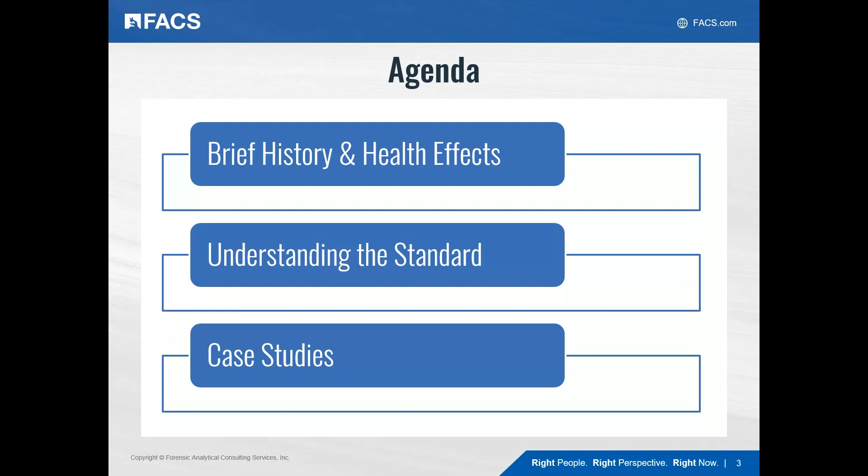So for today's webinar, I will begin with a brief history of silica and exposures, as well as the health effects associated with silica exposures, going into understanding the standard, some of the differences between the general industry standard and the construction standard, as well as case studies, because everyone loves a case study. So, we do environmental consulting. So some of the exposure assessments that FACS has been involved with highlight, when you use engineering and work practice controls, what you see in terms of reduction of exposures to individuals, which is very important.

So I can't talk about silica without talking about Hawk's Nest. The health effects associated with silica have been known throughout the years. However, it really wasn't highlighted as much as it should be until 1930. What happened was in West Virginia, the Hawk's Nest Tunnel was being built, and several workers were pulverizing this rock trying to get the tunnel to go through. And some of this rock contained as high as 99% silica.

And obviously at this time, we didn't have OSHA yet. So by the time the work ended, over 476 workers had died of silicosis. And it was estimated that 1,500 developed this disease within a year or two. So they had high acute exposures to silica. And it's also stated that this probably is a large underestimate of what happened in terms of exposures to individuals and the health effects during and after the tunnel was built.

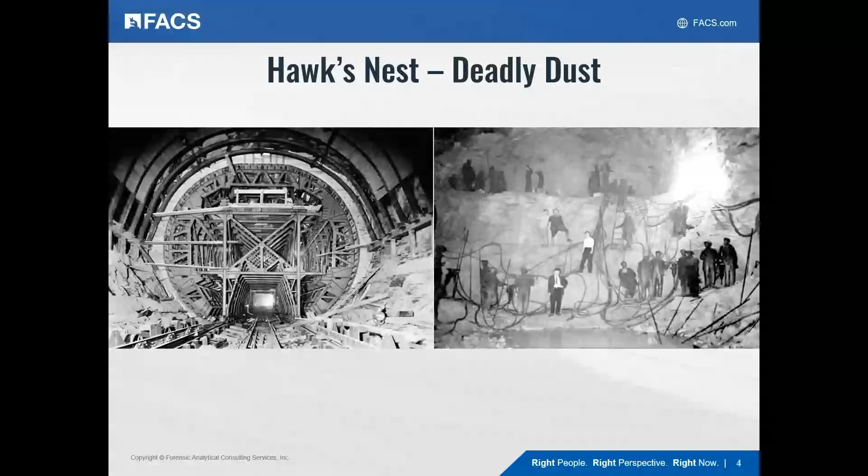But it highlighted the importance of using engineering controls and respiratory protection, because individuals were not wearing respirators when doing this work. So it was a pivotal moment in silica, as well as general industrial hygiene's history. And that happened right in 1930.

And so in 2016, OSHA revised the silica standard. It became in effect on June 23, 2016. And OSHA began enforcement of the standard for construction in 2017 and enforcement for general industry in 2018.

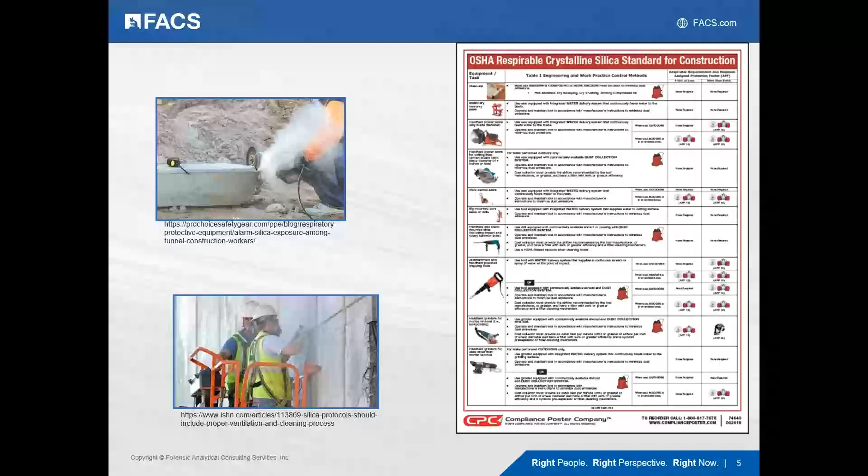I myself have done a lot of presentations on silica, and this is actually my first general industry presentation, because a lot of the focus has been on construction, because that's where we know there are a lot of exposure issues, where people are working with concrete materials, pulverizing it, putting small particulates into the air for exposure. And so a lot of focus has been on the construction industry itself. And although there is a standard associated with general industry, we really didn't see a lot of news or discussions on it.

But a colleague had sent in an article that was recently in the Los Angeles Times, dated September 24th, 2023, and that sparked this presentation. It discussed the number of individuals in general industry dying of silicosis and other silica-related health issues.

This specific article talked about California itself, and it talks about fabrication workers and the development of silicosis within these really young fabrication workers. It's not the 60-year-olds or 70-year-olds with chronic exposures getting silicosis, but now men in their 20s and 30s. And silicosis is an incurable disease, and it can kill someone, cause people to potentially have lung transplants, and it's a very debilitating disease itself.

And within this article, they talked about a study that was done in July 2023 by the American Medical Association, in an article called Silicosis Among Immigrant Engineered Stone Countertop Fabrication Workers in California. The study cited 52 male patients that were diagnosed with silicosis caused by occupational exposure to respirable silica dust from this engineered stone. Of those 52 patients, 20 suffered from progressive massive fibrosis, 11 needed lung transplants, and 10 died due to their exposures.

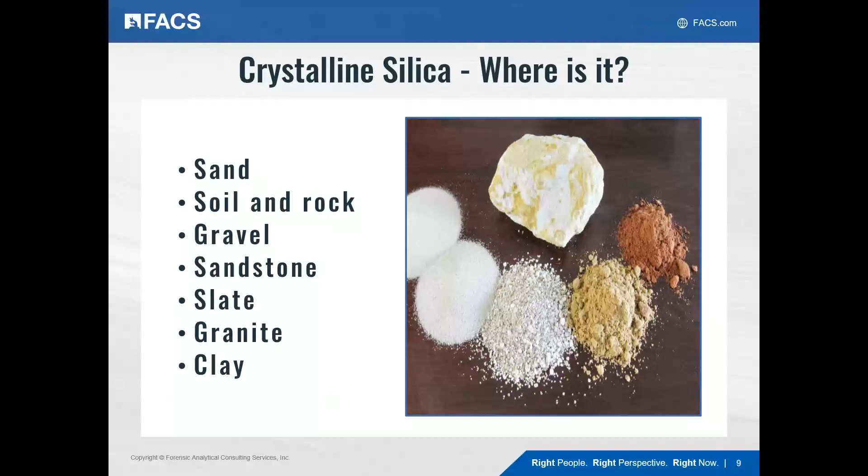And again, we go to the beach all the time, right? Maybe I'm on the West Coast, so I'm assuming a lot of people might be, but you might not. But if you go to the beach, you're in front of silica, right? You're being exposed to it, but is it harmful? And the answer is no, not if it's in that size fraction.

What we're worried about is the really small pieces of silica that are small enough to be inhaled and travel all the way down to the lungs themselves. So if you're just holding sand, it's not an issue, but let's say silica is in concrete. If you're pulverizing it, if you're jackhammering it, if you're doing mechanical work to it, you're creating a really small size fraction of the silica particulate itself. And that has the ability to go into the respiratory system and get down to the lungs.

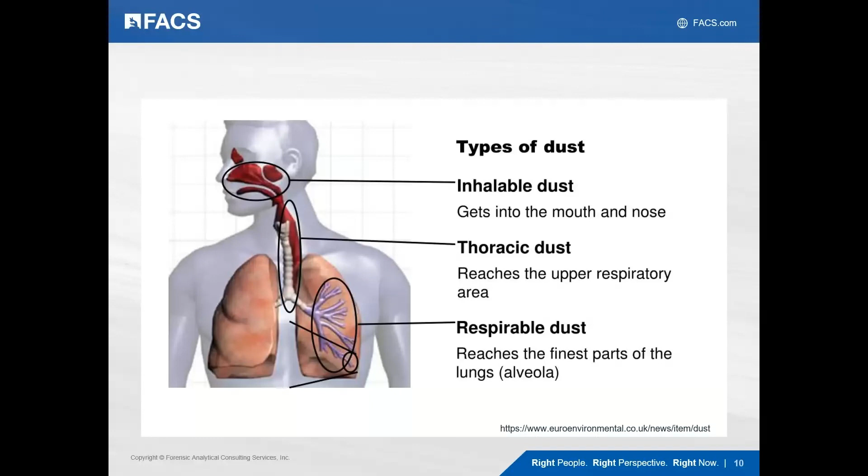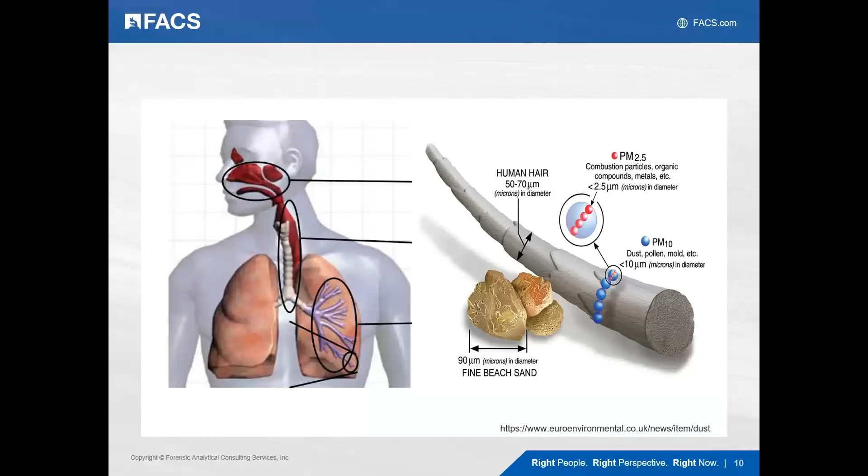And then look right here, your hair, just think about the size of your hair. That's 50 to 70 microns. So really, really small particulates is what we're worried about. I say it's ubiquitous, it's everywhere, but we're talking about, again, the small sizes and a specific concentration.

So what industries are we really worried about in terms of exposures? Well, as I alluded to in the previous slides, it's the engineered stone fabrication. This is probably one of the most dangerous kinds of countertop, the engineered stone, also known as quartz, again, silica. And it has much more silica than any other type of countertop. So people working with engineered stone fabrication have high exposures. Concrete mixing and cutting, that tends to be more of the construction side of work.

Sandblasting in general industry, a lot of people still sandblast with silica-containing material. Brick and stone cutting, foundry, mining, fracking, pottery manufacturing, believe it or not. We've done exposure assessments for silica with EVS or custodial staff when they're doing deep cleaning of ceramic departments at school. And there are measurable levels of silica found in these types of work operations. So it's kind of stopping and thinking about where is there silica and where could there be potential exposures. And there's a lot of this.

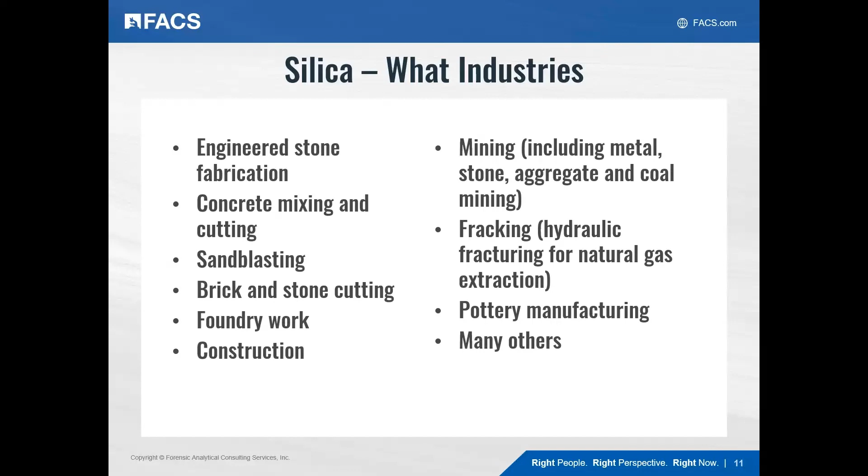So why are we here? Why is it harmful to you? Well, it causes silicosis. And the problem with silicosis is, one, it is incurable. And a lot of the time you can develop silicosis without developing symptoms up front. By the time you maybe have an x-ray or start to feel issues with your respiratory system in terms of harder breathing, it's too late at that point. Some of the symptoms that might occur are shortness of breath, coughing.

As I said, the dust gets down into that respiratory system all the way down to the lungs, and it can cause fibrous scar tissue, which you'll see as nodules on this x-ray here. It is very debilitating, and it can be fatal. And there's 3 different types of exposures that we talk about with silicosis. There is chronic exposure, where there's a latency period where you really won't see anything for at least more than 10 years. And it's really small, low exposures happening through greater than 10 years of someone's work span. And with that, the severity of the illness is highly variable. It might be very mild, or it can be very severe.

The next is accelerated, where you have a latency period of 5 to 10 years, and you have higher exposures. So you're not getting those really small chronics, a little bit higher. And now the severity of the illness is likewise variable, but often more on the severe side. So your lungs aren't getting a chance to repair, to try to kick out the dust if they can. So you see these more severe health effects associated with it.

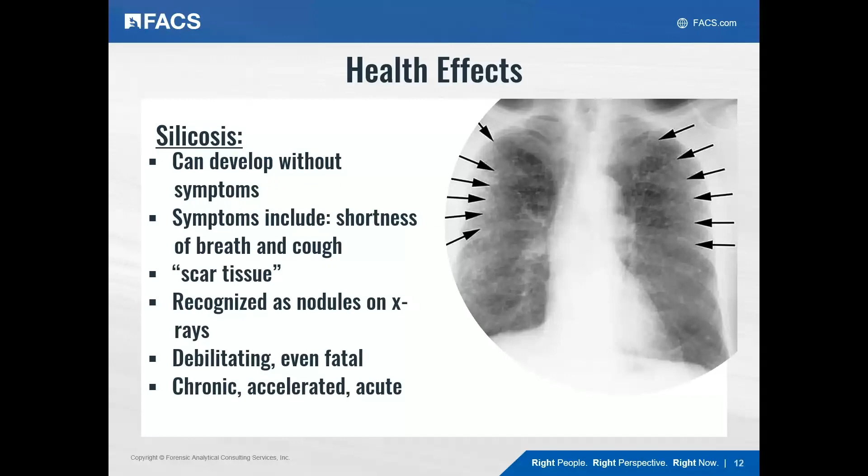But not only is there silicosis to worry about, there's other diseases that are associated with silica exposures. There's chronic obstructive pulmonary disease. Workers exposed to silica, those who have silicosis, are also at increased risk of tuberculosis, which is a contagious and potentially life-threatening infection. Individuals can also have lung cancer, kidney disease. It's also associated with autoimmune diseases such as rheumatoid arthritis and scleroderma.

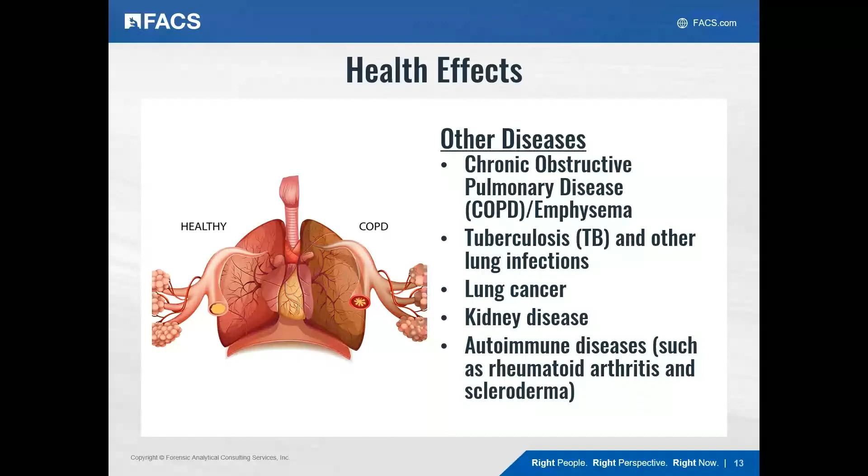So now that we know it's harmful, we know there's a big push to try to prevent this, what standards and regulations do we have that are trying to accomplish it? So when we're thinking about OSHA, we have our airborne contaminant list, which is just that list that we look at that shows what are the permissible exposure limits associated with that specific contaminant. We can look at that. There's also the construction standard that's specific to those in the construction industries and ways to reduce exposures. And there's also general industry and maritime.

So the construction standard only applies to construction, although some people in general industry may do portions of that work at different times of their work schedule. But the general standard applies to occupational exposure.

Sorry, my PowerPoint might turn off here. I just had a, oops, sorry, one moment. It just kicked me out. Hold on one moment. Let me know if I can share my screen too, Michelle. Have it. Sorry, that was, it started to think. Okay, hold on. Okay, do we see it now?

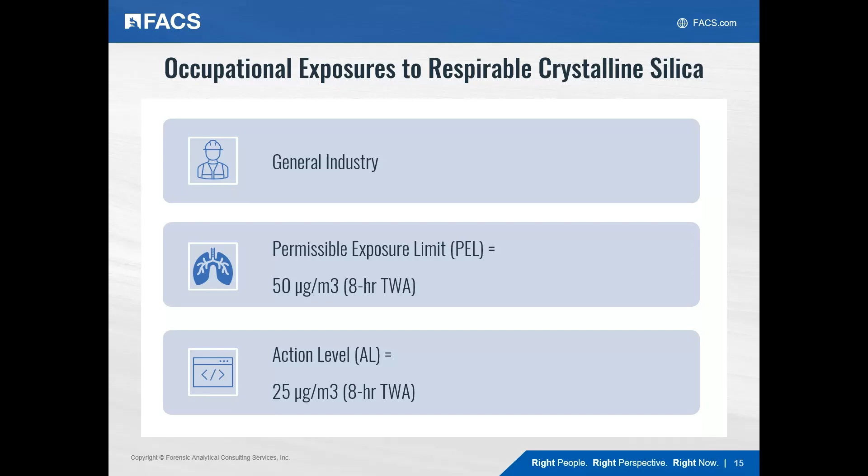However, despite the fact that this started in 2016 and in 2018 became enforceable in general industry, OSHA still estimates that over 100,000 workers in general industry and maritime are exposed to silica levels that exceed this new permissible exposure limit. So that just shows you that even putting out the standard, there still needs to be more awareness and education to individuals of the potential hazard, as well as how to protect individuals from exposures to silica.

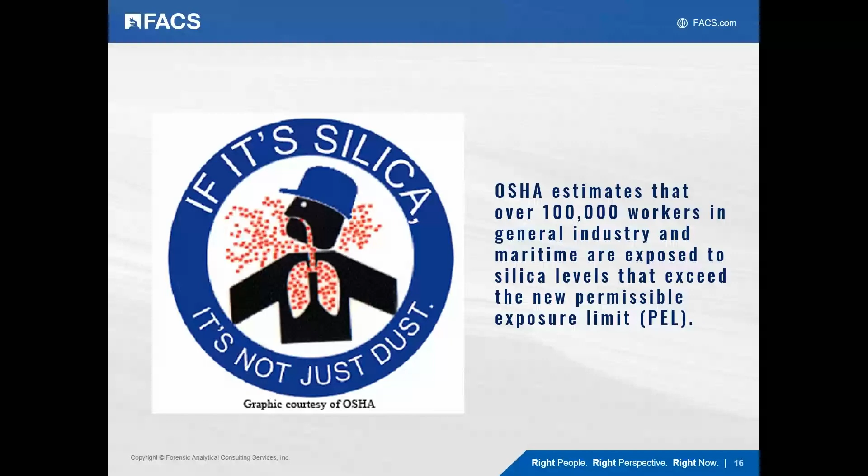So one of the parts of the standard in general industry, again, talks about the exposure assessment, and they kind of go about it 2 different ways. They say you could use the performance option or the scheduled monitoring option. Because we want to see what is the exposure to these individuals. If it's greater than the action level, again, they have to start implementing controls and a bunch of different other requirements within the standard. If they are above the permissible exposure limits, there's even more requirements associated with it.

So in order to do this, you've got to perform an assessment. Number 1 is a performance option. So that gives employers flexibility to determine the 8-hour time-weighted average for each employee based on a combination of air monitoring data that they collect themselves and the use of objective data. And so the objective data is looking at data that is most reflective of work conditions at your site without you actually doing the work.

So examples can be air monitoring data from industry-wide surveys, calculations based on the composition of a substance. You can do area sampling results or historical air monitoring data collected by the employer. So you've got information from way back when, and if nothing has changed, you can still use that data.

Within general industry, I tried to do a little research to see if they've got a lot of that industry data available, and it's not as robust as it is for construction. You can Google construction objective data silica, and there's a few websites that go over if you're jackhammering and this is happening, they'll have data for you that's available. So you can use that if you're maybe a smaller business and don't have the funds to perform your own exposure assessments.

And with that, they require a written exposure control plan. And what the written exposure control plan is, each individual task that's going to be performed has to be described along with what controls are going to be used, what housekeeping measures are going to be used, and what respiratory protection is going to be used. So you're not just going to have one written exposure control plan unless it's only one task that involves silica.

But if there's various tasks, you're going to have various written exposure control plans, and maybe even the same task, but within different environments. So for instance, if you have a fabrication worker, they may be cutting it inside the facility, and you have a written exposure control plan associated with the work done in the facility, but maybe they go to the residential home where they're going to be putting in the new stone top in someone's kitchen, but they've got to cut and maybe grind, polish, and do a little bit more work.

You're going to have another written exposure control plan for that. So it's something that employers must do, and they've got to implement the use of it, and it's got to be reviewed yearly and made available to individuals.

So to me, this is kind of like, if you think about construction, a job hazard analysis, looking at the issue and making sure that you are making it specific to the situation in which the work is being done, rather than just saying we're going to use local exhaust ventilation. It's more specific on what's going to be done for that specific work task.

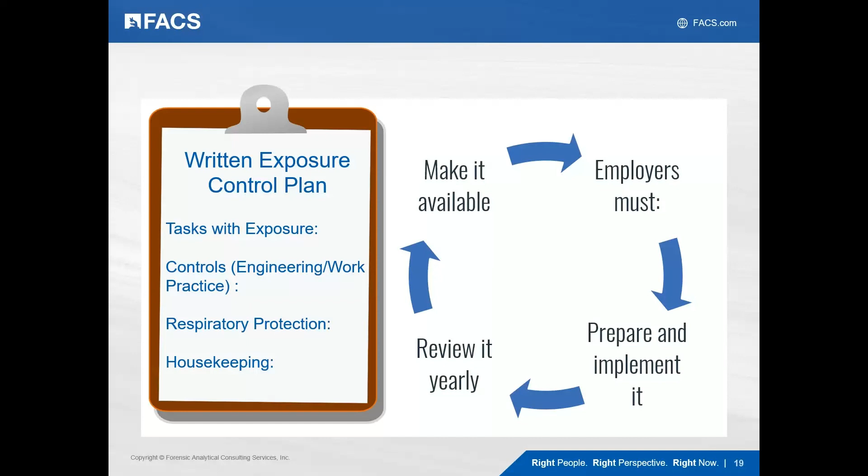And it's very important, and it's very spelled out in the standard, that the use of exposure controls is necessary when you're dealing with silica. So as we know, we have this hierarchy of controls in industrial hygiene where we begin with engineering controls. There are other ones, elimination, substitution. Let's pretend like we can't get rid of the silica. It's in the concrete, or it's in this granite piece of material. It's going to be there.

So we want to look at the engineering controls. How are we going to reduce exposures? Are we using wet methods, so we don't allow that silica dust to become airborne? Are we going to use local exhaust? Work practices, maybe we're reducing the amount of work that individual can do because we know that there's high silica exposures.

As well as at the end, the personal protective equipment, the use of respirators is very important. So we want to start with the higher controls, and then as necessary, the use of respirators as our last line of defense.

And again, something different in general industry versus construction is that in the construction standard they have that nice table for you that outlines what PPE is supposed to be worn during certain situations. They pretty much tell you what you have to use. When you're doing general industry and performing your own assessment or objective data, you have to use the calculated information or air monitoring data that you have available to dictate the specific respiratory protection that will be required for the individuals.

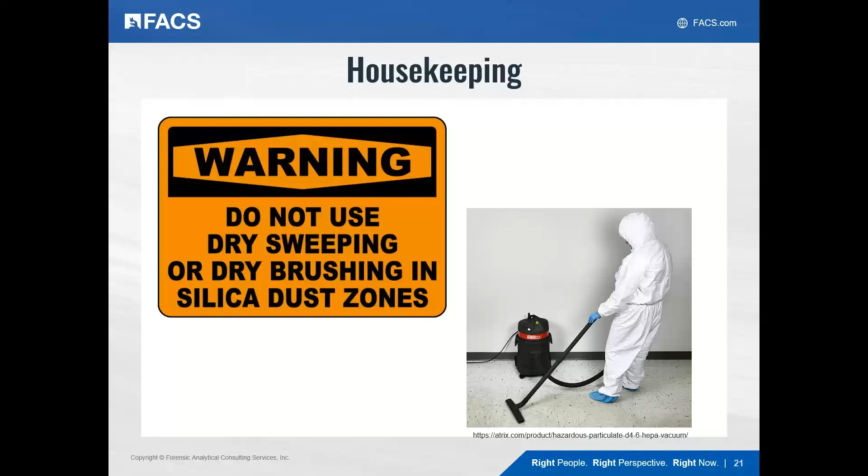And medical surveillance is also a requirement. So if a person is exposed to silica at or above the action level for more than 30 days in 1 year, the employer has to make medical surveillance available at no cost to the employee. The initial examination has to be offered within 30 days of employment. So you need that chest x-ray to look at what is going on with the individual themselves.

And then every 3 years, they have to go back in with the medical surveillance program, get their chest x-ray, perform the physical exam, the pulmonary function test. Again, remember I said in the health effects that they're more prone to tuberculosis. So the medical surveillance program also requires that the individuals are tested for TB.

So it's probably one of the more stringent medical surveillances I've seen with OSHA. We have asbestos, where they do require the annual chest x-rays, and lead for testing. But this one was probably one of the more stringent ones I've seen, again, asking for the TB test.

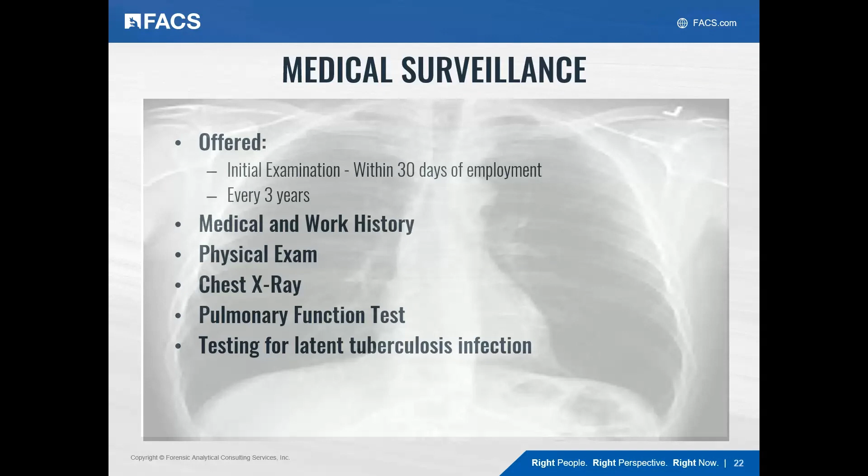So it's very important. The whole goal is we want to reduce exposures to individuals so that we're not hitting this action level, so we're not having to put people into medical surveillance programs, because it's costly, it's time-consuming, and it requires a lot of employers and employees. So the goal here is to reduce exposures to the extent possible.

And additional items is the record keeping. You have to make sure that you keep all the air monitoring data that you've collected to date, and that outlines what was the task that the sample was collected during, what are the analytical methods. The standard specifically talks about sampling and laboratory requirements associated with the standard. So you can't just use any lab. It has to have a specific detection limit and use specific analytical methods.

If you're going to use objective data, you've got to make sure that you are also keeping that, so that you can show someone, if we're not collecting our own samples, here's the data we're using in order to characterize your exposure. So what were their testing protocols where you got the objective data from? What is the source of the data? Any of the other relevant information that puts your situation similar to the situation of the data that you are using. And you've got to keep all of your medical surveillance information as well, which is the medical written opinions of the health professionals.

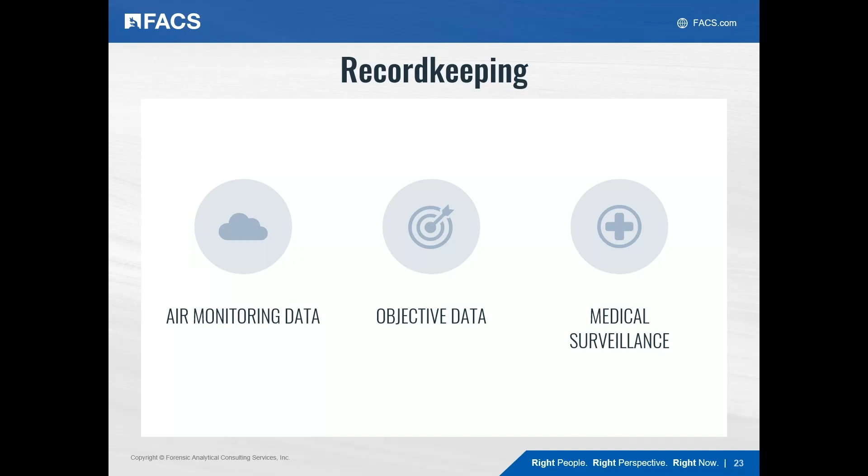And so just to wrap it up again, I found this nice table that outlines it very nicely. So what are the requirements from the standard? There's air monitoring requirements. If you hit above the permissible exposure limit or an action level, what do you have to do? You've got to do monitoring every 3 months if it's above the permissible exposure limit, every 6 months if it's between the action level and the PEL. Regulated areas: if you're above the PEL, you've got to start putting in signage at all times in areas where people may be exposed to silica above this permissible exposure limit.

You've got to develop exposure control methodologies and provide those in writing, and train employees. You've got to do the medical surveillance and make sure that any individual who may be exposed to levels of silica above the action level more than 30 days has the chest x-ray, the lung function test, and the TB test. And so that's within 30 days for your initial examination and every 3 years after the fact. So very specific on it.

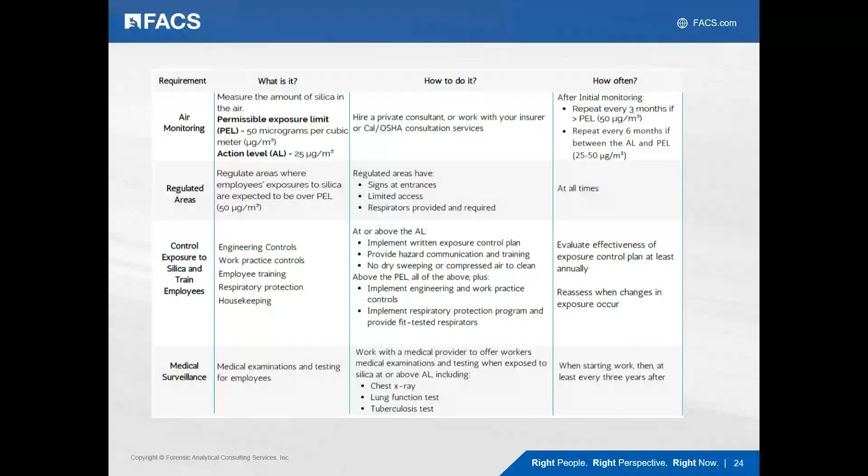So now let's go into the fun stuff, the case studies. FACS has done a lot of projects with silica, and so I wanted to highlight some of the more interesting ones that highlight when you introduce controls, what you get from it. We've done ones with ceramics departments where we found low levels, nothing really above exposure limits. So I'm just going to go on ones that found significant exposures. So the first case study is at a fabrication facility. Our purpose was to evaluate silica exposure of employees, and they also wanted us to evaluate the effectiveness of their engineering controls because they already had ones in place.

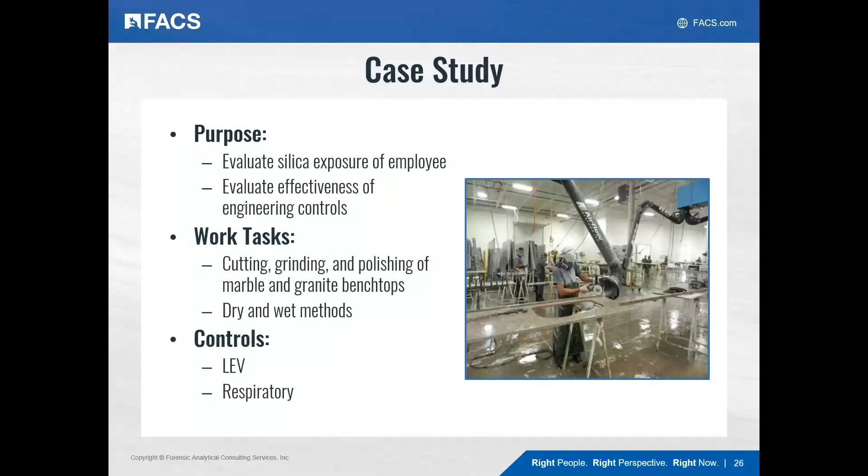Within this project, the employees were cutting, grinding, and polishing marble and granite bench tops, and they used both dry methods and wet methods. And the controls that they had were a local exhaust ventilation system, and employees were wearing respirators. So here are some of the photos where you see the wet methods being used, as well as all the different local exhausts associated with the project. If you see on the far right, he's doing work on this granite top, but in this dry operation, he doesn't have wet methods associated with his work. And his local exhaust is pointed in a different direction. It's not even near the area in which he's doing any work.

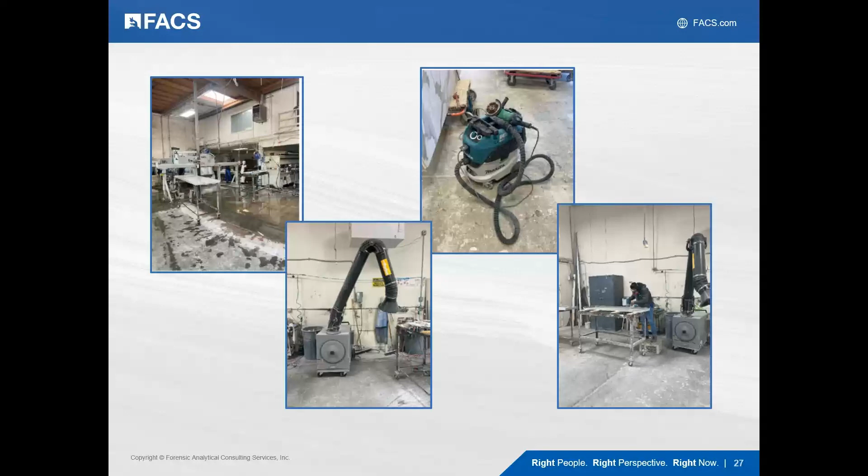So when we collected our samples, there were 3 different individuals, 2 on the dry operation side and 1 on the wet side. And the results found that the 2 individuals working on the dry side operations exceeded both the action level as well as the permissible exposure limit. And the individual on the wet side did not exceed either. So when you use wet methods, where you are adding water to the system while you're cutting, it reduces the generation of airborne dust, and we didn't get exposure that exceeded anything.

And so what we concluded was that we have these 2 individuals with high exposures, and now they are required to wear the respiratory protection that they were already wearing. And we calculated the assigned protection factor, which was 5 or greater. And now that we've exceeded the permissible exposure limit, they have to comply with a lot of the silica standard requirements: the written exposure control plan, demarcating and regulating areas, repeating the exposure monitoring quarterly, medical surveillance, record keeping, and implementation of work controls. And that's just specific to exceeding that. But because we don't want to just collect the sample and say here it is, we are observing the work practices and the space while we're out there.

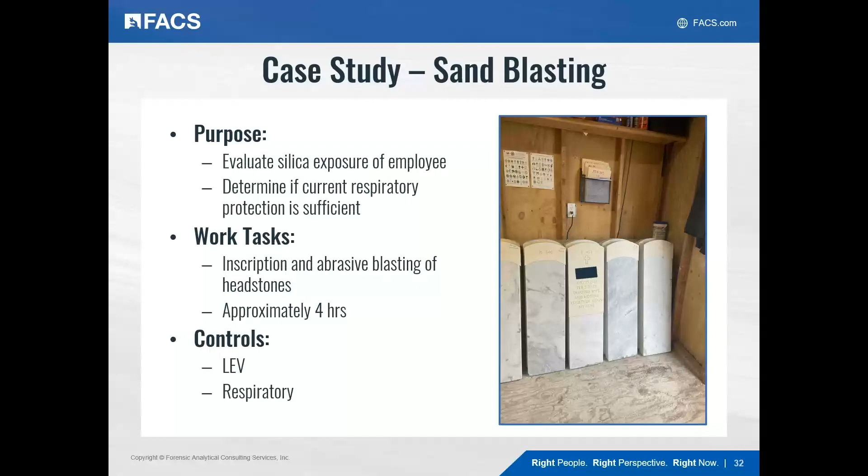This individual already wears respiratory protection, as you see here in the photos. And he has 2 different levels, one for when he does the sandblasting and inscribing inside. However, there's a lot of dust being generated. So at times he would wear the smaller half-face respirator for other lower dust generating projects.

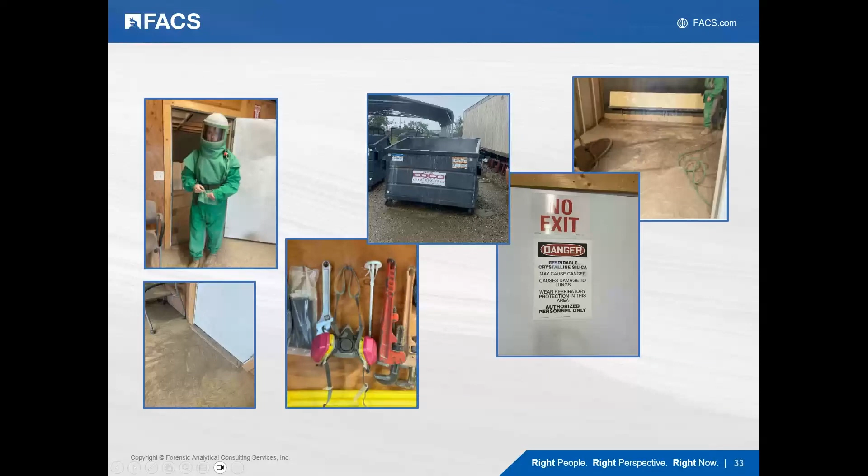So this was observed to be a very dusty project. If you see on the lower left, there's a lot of dust coming out from the room in which work was being performed. So it wasn't a completely sealed room. And what we found with this individual was really high exposures as well, as you would assume, just by looking at the amount of dust that was observed. This individual exceeded both the permissible exposure limit and the action level during this type of work.

And we did some area samples, one outside because we knew it wasn't completely sealed, as well as one in the room itself, the blasting room. And luckily outside the room, even though we saw the dust coming out, we didn't get any high exposures. There were no measurable levels identified, but definitely really high exposures in the room itself.

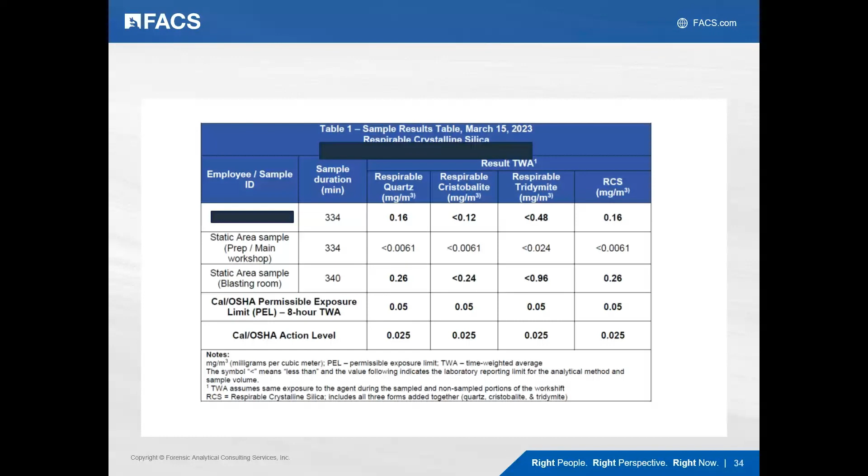And from that, we recommended, again, that they have to continue the use of respiratory protection. His exposure was a little bit higher, so we recommended an assigned protection factor of 10 or greater. We also recommend, by just visual observations, that when the individual was dumping dust from a dust collector, they were doing it without respiratory protection and just throwing it into a large trash collector where a lot of airborne dust was being generated. So that's another potential exposure. So we recommended wearing a respirator when doing that type of work.

We also were told that the individual sometimes dry sweeps, so we made sure to comment: do not dry sweep. And the individual didn't really store his respirators properly, so we made recommendations for that as well.

And we oddly had another case that was similar, where someone was also doing the same thing, inscribing and abrasive blasting of headstones. However, in this project, all of this work was done in an enclosed system equipped with local exhaust. So instead of having the individual go into a room and do it themselves, it was all electronic within the system. So all of the sandblasting and the work was in this nice little enclosure, and the worker was outside the space. The worker only went inside to set up, prep, but none of the inscribing or abrasive blasting was ever occurring when the worker was inside.

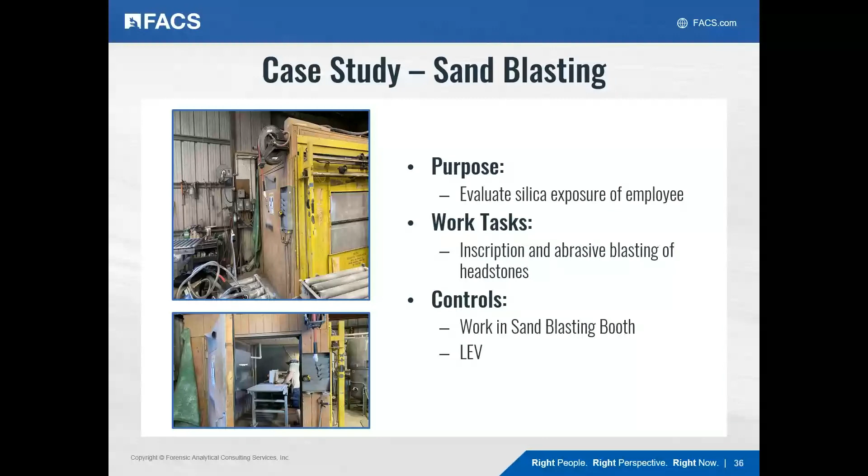So using this type of isolation control, as you see here, significantly reduced exposure. So this individual did this work task and no measurable levels of silica were present. So that just shows you it's two of the similar work tasks, the inscribing of headstones. But when you do it electronically and in a closed system, you have no exposures or insignificant exposures to the worker versus the high exposures when the individual is doing it themselves.

So when we did the first project with the individual working inside, and then when we saw this project, it was like, wow, what a big difference, and a way to protect an employee by moving it and no longer allowing just an individual to do it, but doing it in a different manner.

Another case study, a project you wouldn't think you would have high exposures to silica, and again, just outlines the importance of understanding the industry, right, is a dental appliance laboratory. So we were asked to evaluate silica exposures because they knew that some of the materials that they work with when they're making models for dental applications contain up to 5% crystalline silica. So we were asked to evaluate workers in the dental appliance lab.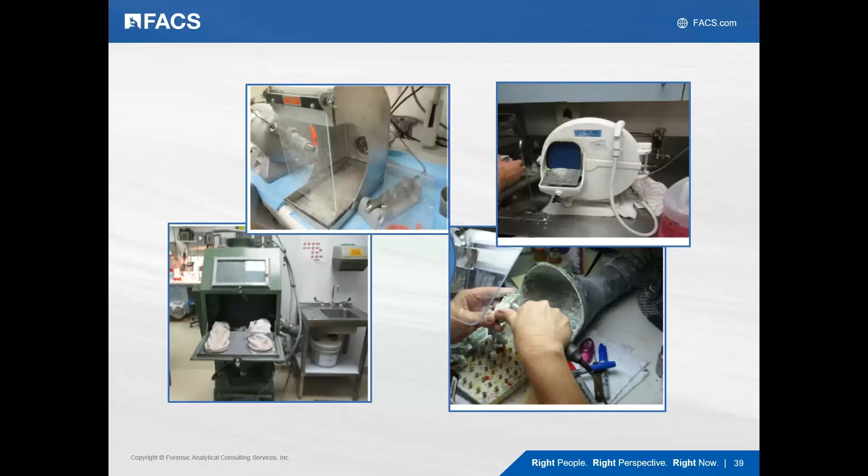So we recommended that this individual, as well as anybody who works in the same type of work practices or activities, has to be involved with the silica standard. And we've got to put the silica standard requirements with the employer. So developing written exposure control plans and medical surveillance, because this was an individual who will do this for more than 30 days of the year. And one of the biggest things was the increased housekeeping efforts that we thought were necessary. We saw these levels of dust, and we thought if they increase their housekeeping measures, that might help reduce exposures to the individual.

And so all of these were really important to highlight that, one, you can't just assume that someone's not exposed to silica. You really have to look at safety data sheets and the way they're doing work and evaluate. And also the importance of the use of controls to reduce exposure. So stopping and thinking, someone doesn't have to be exposed to silica. There are ways we can reduce that, implementing wet methods or local exhaust. And then once you've done that, continue to reevaluate to try to reduce exposures even further below action levels. We want, in a perfect world, no measurable levels of silica.

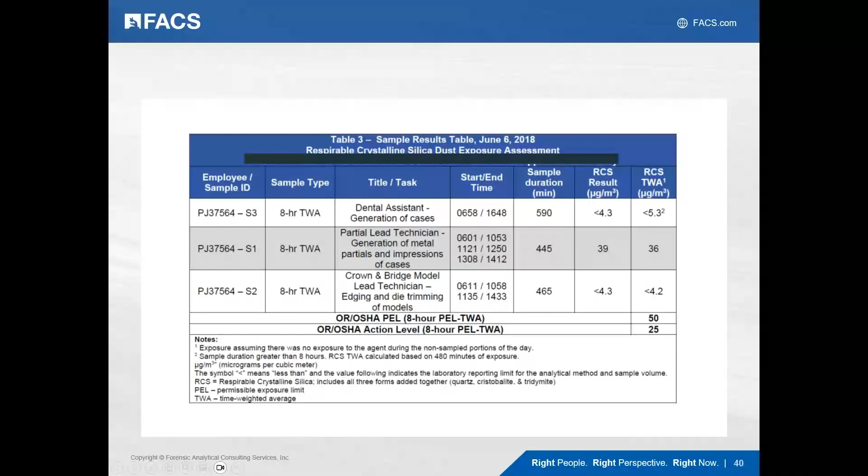And the second question to that initial question was, what sampling method would you use to test for such low levels of exposure? Oh man, I would have to look, I don't know what the detection limit is. Can I go back a second? Sure. Let me see how low our detection limit got in some of these. Yeah, that would be hard because look right here, we have 4.3 micrograms, and that was a really long sampling duration.

So the PPIs that I was speaking of. When you use a cyclone, I think the highest is, if you use an aluminum cyclone, you can get 2.5 liters per minute. And if you sample for 500 minutes, you can only get to 4.3. The PPIs have a specific PPI that will allow you to do 8 liters per minute, which would give you a higher volume and would probably allow you to get to that detection limit. But if there's any dust, at 8 liters per minute, you'll probably overload your sample.

So point being, it's probably going to be very difficult to get to that unless laboratories, which already do a great job, get better in their detection limits. Okay. And Madeline Dangazian out of our LA office, another one of our CIHs, mentioned in the chat: longer duration sampling to lower DL, or with PPI, higher flow rates. Yes, exactly. Thank you, Madeline.

We've got just one more minute left. We'll do this last question here. Are any of the silica standards risk or health-based in our regulations, or something different? They are risk and health-based, but obviously the OEHHA ones are more health-based. These take into consideration general industry or all industry and what they can accomplish. Whenever they have a new standard, they put it up for public review, and then industry comes and says, we can't do that. That would cost us $800 million.